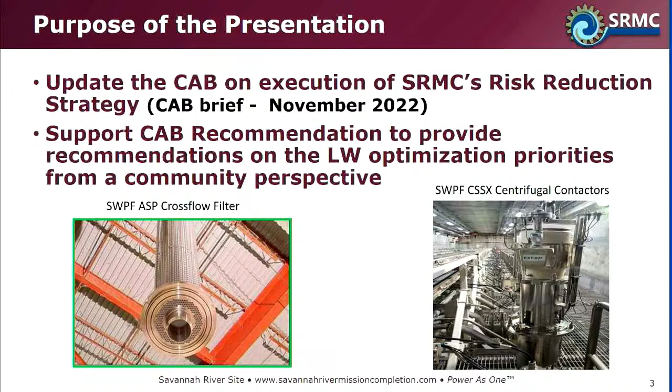I know we have some new CAB members since the last time we spoke, so I was just going to give a very brief overview.

The last thing we're actually building are the last three SDUs, 10, 11, and 12, which just store some of the decontaminated salt solution after it gets grouted and solidified. But all of the processing plants are online. So the mission that we have is pretty simple at this point, in one frame. As far as conceptually, the work involved is complex.

But we remove the waste from the waste tanks, we treat the waste through SWPF and defense waste processing facilities, and then we dispose of the waste. The high activity material we put in glass that comes through DWPF and put in canisters. The lower activity decontaminated stream goes to saltstone, and we make grout that goes into the SDUs.

Some of the concentration of waste in the tank farm, when we do that with the evaporators you can see over here - when they run, they help bring some water off of the waste and concentrate the waste down, and that water gets cleaned up to be releasable to state waters. The canisters are currently stored on site in the glass waste storage building. Once again, we have all that we need there - those buildings, with the double stacking we're doing, will hold all of the cans we're going to process. We are still taking some waste from the canyon that goes on the front end of our process. So that's our mission, and we're very dedicated to that as a collective team.

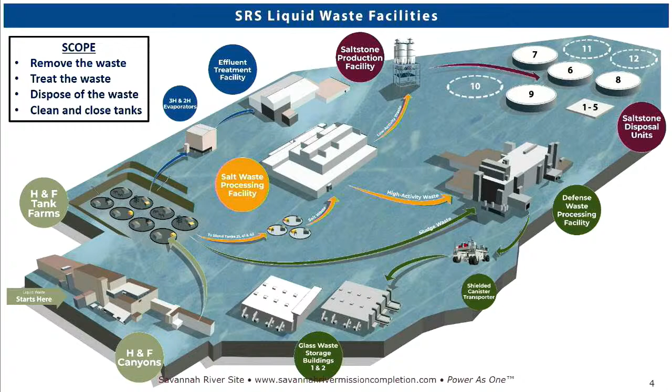Just looking across the top, for the total mission, if you look at our system plan, there are about 19 sludge batches that have to be processed through DWPF. Nine of those are complete, and we're currently processing batch 10. For salt batches going through SWPF, we're projecting 102 batches that we'll make up and feed, of which we're through batch 7, about to move batch 8 over in the next month or so.

Total number of cans that we're going to make over the life of the mission is just north of 8,000 canisters. We're over halfway there already with all the sludge processing and integrated processing we've done to date.

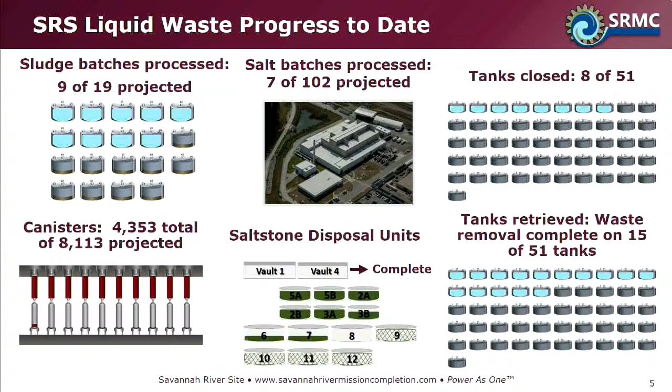Our focus first and foremost is the high curie material first, because that gets the risk down. Just once again, a curie is a measurement that helps define the level of activity or level of radioactivity, the intensity of it for the liquid that's in the tanks. So we made it a priority for SRMC when we came on board to say we wanted to process the higher curie material first and get that through the system.

Because that drives the risk down of what's left in the tanks. The other focus that we had in addition to going after the high curie material is to focus on optimizing and increasing the throughput of the system. Since SWPF has only been online for a few years, when you bring a new plant online and integrate it to the overall series of plants that it's interlaced with, you go through a period of ascension, ramping up, working through issues in the process.

And so we have a heavy focus on optimizations and increasing the throughput and the availability of the plants, and so I'll talk to that today. Part of that is optimizing the timing of when NGS is deployed. I know that was a topic that was brought up yesterday. I'm going to speak to that today and where our current thinking is on that and why.

And then once again, part of the risk reduction strategy is focusing on getting the high-level waste out of tanks that are the old-style tanks, with a particular emphasis on old-style tanks that are actually in the water table in H tank farm.

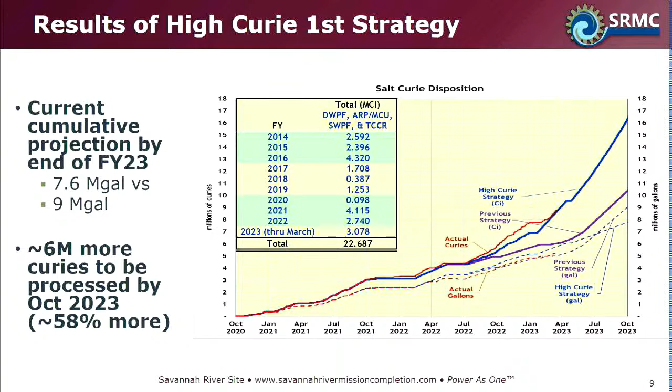So now I want to talk about SWPF processing throughput rates as we keep driving the higher curie batches through, and how we continue to further advance that risk reduction by driving our throughput up as we work through some of these initial issues.

Here's your first car analogy. When you think about the two things that are important about ultimately getting the mission done, you have to get the availability of the plants up, and you've got to get the throughput of the plants up. So if you're driving your car, availability is: is it in the shop or is it on the road driving? And relative to throughput, it's how fast are you driving. I'm going to need both of those, a car on the road and a car that will go the speed limit, to get me to Oak Ridge on time today. So it's nothing more complex than that.

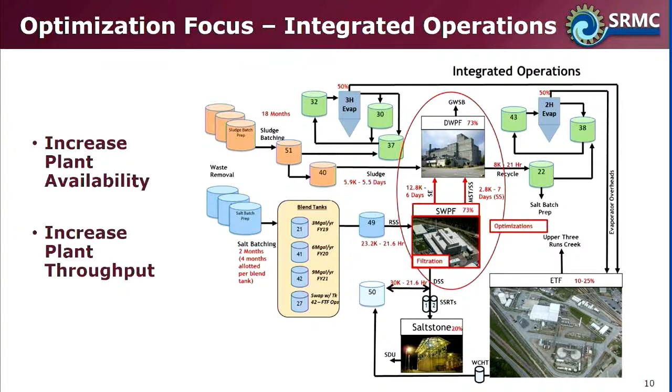Our focus is several-fold. One of the things is we're trying to get our process availability up. Relative to SWPF in particular, we have some solids forming that are causing us downtime, particularly with solvent extraction and particularly with the SE coalescer that's part of solvent extraction. We're seeing it in the contactors and in the SE coalescer.

Relative to throughput, right now filtration is the issue. The way SWPF works is the front end of the process is filtration - we filter out the actinides, things like strontium and plutonium, and those go to DWPF to get in the glass. After filtration, it goes through solvent extraction where we strip the cesium out, and we take the cesium to DWPF and put it in the glass. Then the decontaminated salt solution goes to saltstone - large volume, but decontaminated.

So what happens is while solvent extraction is causing us availability problems, filtration is causing us throughput problems because we're not able to filter as fast as we need to, and we're having to limit solvent extraction's rate because we'll run out of feed if we don't. So a lot of our efforts, which I'll go through in a second, are related to addressing both pieces of that.

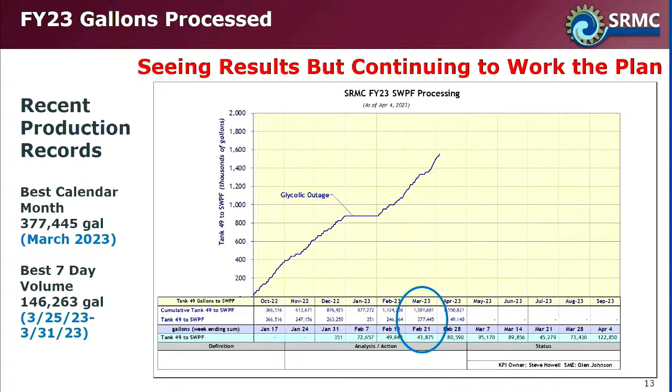Related further to optimizing when NGS is deployed, as I told you before, we originally thought we'd put it in at the end of all the high curie batches. Our modeling has shown that to get to a plan that finishes our mission in 2037, our internal goal, we have to get to higher throughput before that, and we've been seeing good promise with filtration. So what this is reflecting is that in 25, we need to be running at a rate that requires NGS, and filtration has to support it as well.

So what we are currently planning, like you saw in the last graphic, is that right now we think we'll deploy in 24. That's our management decision, hence why production is a little lower while we're doing that, even though we're climbing. The goal is still the same: once filtration is no longer limiting, we'll deploy it, because that lets us get up to these 9 million gallon a year rates overall, which we need, and it's where we're headed.

So that's kind of the curie risk reduction, optimization of SWPF, and how it ties in together.

One thing, back to car analogies, since I don't think I mentioned it earlier, but I did back in November: our throughput ultimately drives how many gallons we're pushing through the system. High curie strategy then is a measure of how effective we're being at getting risk reduced in those gallons. Think of it like miles per gallon, as I used before. You've got miles, you put in so much gas in your car, and depending on your miles per gallon, that determines how much further you can go. That's the same strategy we're doing with high curies while we drive up throughput as well.

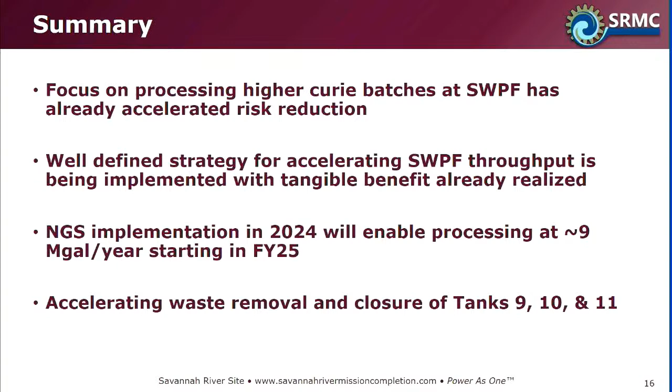And with that, I'll open it for questions.

We'll start down here with Donald. Yes, sir. Oh, can we get you a microphone, please?

Okay. Okay. We'll come all the way around. Sade? Hi, thank you for your presentation.

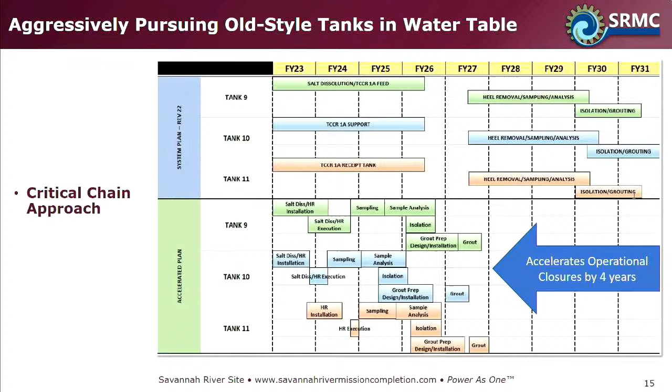That way he can juggle between those and make sure he's supporting all of his customers. With critical chain, you can't do it across your whole project because you can't take that flexibility for people to manage their work away, but you can apply it to a few things that are very, very important. In the past we've done it on things like a melter changeout. When the melter fails in DWPF, all of liquid waste shuts down. So we treat things that are super critical like that with critical chain. It means that is first above everything else. We want to know exactly how long it takes you to do it.

And as soon as you're done with your activity, you finish it, and then you go back to the other, more normal project management schedule, where he has contingency on all of his tasks. So you can't do it everywhere or it doesn't work. But when you have a few things that are super critical like this, it is very effective in driving the schedule faster. So to some degree, what you're doing is saying no multitasking. That's what it says, out of his multitask list of items, when this hits his desk he stops what he's doing and does this, passes his part on, passes his baton on, and then he goes back to his other activities.

Because that process is accelerated, does that mean that any of the safety checks and such are reduced? No, all the same levels of safety checks, the redundancies, like when you have to have second person reviews, the level of his review is not being shortened. We're not asking the person to do their review faster. We're just saying when that activity hits your desk, don't let it sit on your desk for a few days before you do your work. Pause the other things and work on this activity. So everything is exactly the same. The amount of effort they apply, the number of redundant checks that are done, none of that changes.

I would think this would be fairly disruptive in their process. Is there a management overview process determining what tasks fall under critical chain? Yeah, the only ones we're currently deploying it on right now are tanks 9 through 11. And we keep it to a very small group for that reason. Like I said, in the past we've used it on things like melter changeout. This is a case we're using it. We use it on construction of an SDU project because that is a separate team, a dedicated team, so it works very well there as well.

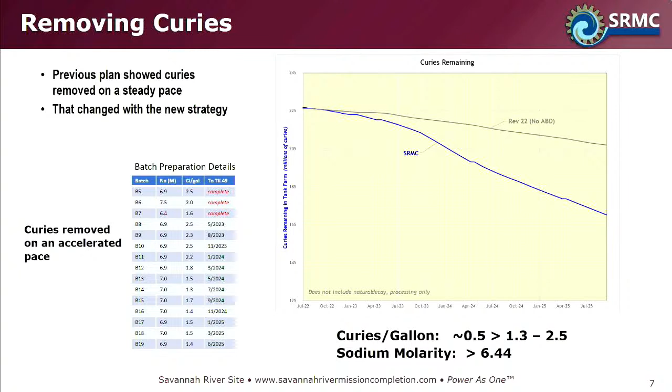I'm not seeing it right now, but it's on.

I'll keep looking. But what we're doing is the dilution that we do in SWPF - we're raising the molarity internal to SWPF and diluting it less before it goes through solvent extraction. We're doing that very deliberately because we want to make sure we don't cause a solids formation problem.

Solids can form if the sodium molarity gets too high, or if your temperature or process flow streams aren't set just right. So you have to be very deliberate as you ramp up internals of the plant, monitoring your parameters well, controlling your temperatures and feed rates well, so you can ramp it up and get the benefit without causing further solids.

We've already increased that and started that campaign a couple of months ago, and it's working very well. We've seen no problems, and past testing tells us that as long as we pay attention to the things we're paying attention to in the plant, we should be able to bring it up.

So this leads to the question for me: the glass plant has been around forever, and it's worked perfectly, and it's old school now. With you ramping to 8.5, 9 million this quickly, are they going to be able to handle it?

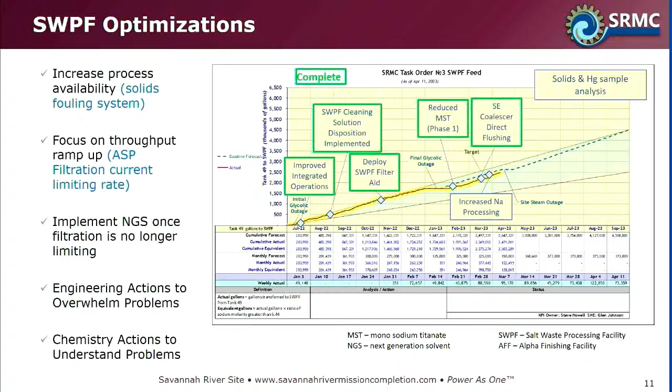So those are probably some of the more significant ones. The other one I would mention is, as I talked before, this lets us not have to take solvent extraction down as much, so the availability on the plant is higher, because we flush the coalescer online most of the time - we don't shut down to clean like we were doing early on. That's been very helpful as well.

But these are some of the ones from this big list that have been very helpful, and there are some others on here that also contributed.

But everything that we've done prior to this May window, all of these improvements, those ultimately are what's helping us get the kind of numbers we're seeing today.

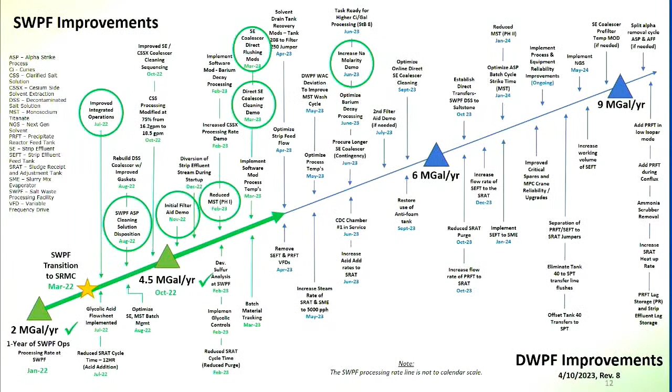Are you going to continue those improvements so you're able to remain at the same level of optimization? Yes, ma'am, that's exactly right. The only one we're not doing right now is the filter aid item, which had mixed results, so currently we're not doing that. We have an activity later where we'll reevaluate whether to do it again, but right now we probably won't need it given the rates we're getting from other improvements. All the other improvements shown here through May, we're continuing to do.

Okay, thank you. I'm also curious, is the average closure for 3 tanks, 4 years? Every 4 years you close up to 3 tanks?

No, it doesn't quite work in a linear fashion because a lot of things are dependent on it. One thing is funding, like to grout the tanks. We're putting all the focus of the funding dollars on risk reduction, the waste removal from the tanks. So if the next dollar spent could either grout an empty tank where the risk has been removed, or get a tank ready to pull more waste out and reduce risk, we're focusing on the risk reduction. With dollars in excess of supporting the plants running at full rate, we start grouting tanks. So sometimes we'll empty a tank and let it delay a little before we grout it.

The other thing is the throughput on the plants. We have several tanks outfitted right now to dissolve salt and get the waste ready for salt batches, but the plants aren't running fast enough, so some of those tanks are sitting waiting for volume to open up, free space, so we can make up salt batches to send to the processing plant. As we continue to ramp up throughput, that starts happening faster, and these outfitted tanks can start dissolving and making up salt batches.

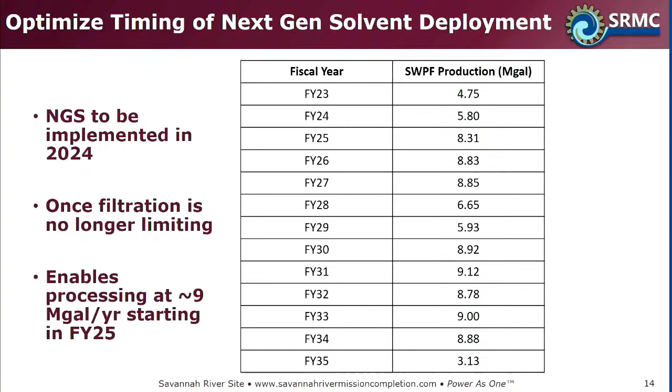So you've got some lower production in FY 28, 29. Clearly that's for some expected downtime. I'm curious what you're expecting in those years that bring you down. FY 29 is a melter change out, so we forecast usually about half a year of downtime for the melter, and 28 might have been, I think, the tail end of 28 and the first part of 29 is when that change out is. Thanks.

Anything else from around the table? Mike, thank you. Okay, thank y'all.

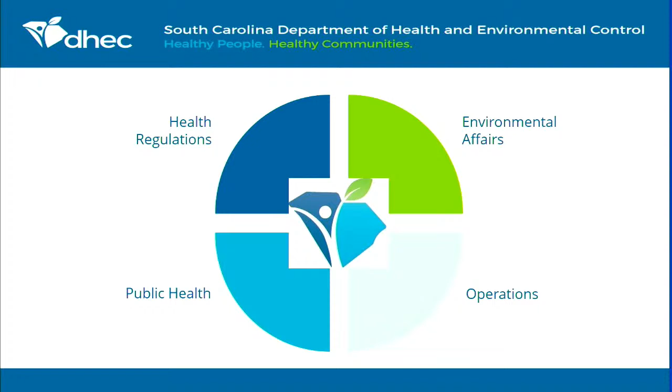Okay, so everybody likes Dr. Seuss, right? My favorite Dr. Seuss character is the Lorax, and I like to think that Environmental Affairs is a little bit like the Lorax. But instead of speaking for the trees, we speak for the air, the water, and the land.

And we do that through our Bureau of Air Quality, Bureau of Water, Bureau of Land and Waste Management, Bureau of Environmental Health Services, which is our district offices, and the Office of Ocean and Coastal Resource Management, or OCRM. With the exception of OCRM, all of these other bureaus interact with Savannah River Site. Unfortunately, SRS is not on the coast, so OCRM doesn't get to play.

DHEC's environmental roles cover four areas: protection of the environment, oversight of activities at the site, emergency preparedness, and improvement through our cleanup programs.

Before I go through each of those areas, I just want to remind you of some things that we do not do at DHEC. We do not regulate the storage of spent nuclear fuel or nuclear materials.

Okay, so what do we do then? I'll start with protection programs. We have environmental permits, and those permits allow the Savannah River Site to conduct activities, but they have to be consistent with federal and state laws and regulations. EPA has delegated authority to the state for a variety of programs in our air, water, waste, and cleanup programs.

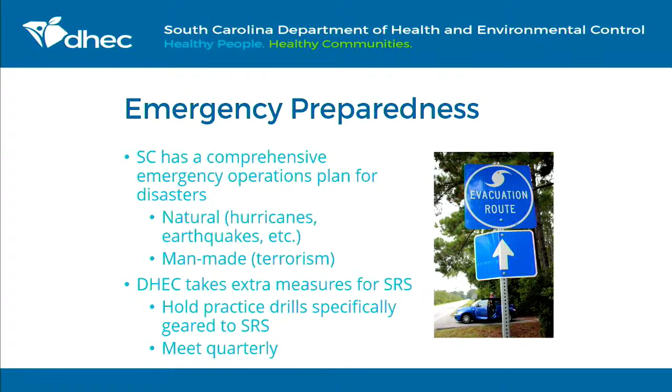Now I want to talk about the final area of environmental affairs, and that's improvement. We are working to improve the quality of life for all South Carolinians through health in the environment, and we do that through our cleanup programs.

We also have a cleanup program through the Federal Facility Agreement, or FFA, and this is mainly our Superfund program that I mentioned I manage. The Federal Facility Agreement takes the RCRA requirements and the CERCLA requirements and marries that process so that the documents we're reviewing will satisfy both RCRA and CERCLA.

The Federal Facility Agreement is a three-party agreement between DOE, EPA, and DHEC. It is a document required by CERCLA for federal facilities, but it can vary between sites. For instance, Savannah River Site's FFA is different than an FFA you would see for Hanford or for a Department of Defense facility.

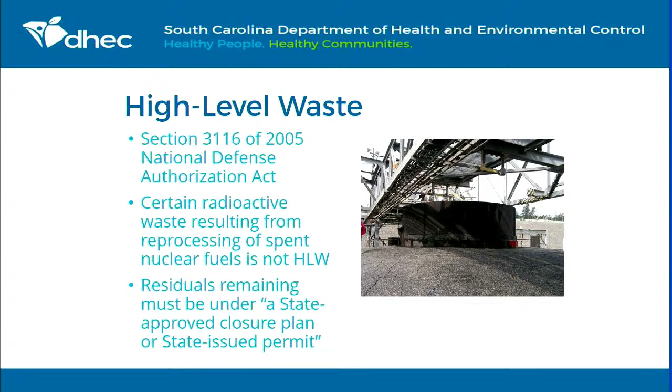So this is where our high-level waste tank permit comes into play. The high-level waste tank permits are written through our Bureau of Water Industrial Wastewater Program. They are operated through a wastewater permit, and then closure is conducted through wastewater closure modules.

We have a consolidated general closure plan that covers the F and H area tank farms, and then there are tank-specific closure modules for each tank as they are closed out. So as Mike showed you the list of tanks, one by one, we'll develop a tank closure module for tank 9 as that one closes out, and tank 10.

So the closure modules are, as I said, tank-specific. They describe operational closure activities. DHEC is going to approve all activities that are associated with waste removal, stabilization, and closure of the tanks. Once a tank is closed out from the wastewater permit, then it will be handled under the Superfund CERCLA program that is under the FFA.

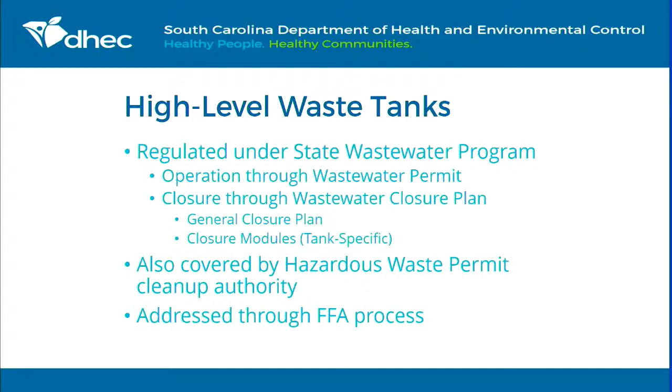There are milestones in the Federal Facility Agreement for preliminary cease of waste removal from the tanks, so that's removing waste out of the tanks, and operational closure, that's grouting up the tanks. Mike alluded to that schedule.

This is for the non-compliant tanks. There are 16 of those still in place. A couple of those are the tanks that are in the water table that he mentioned, where we want to get those accelerated and reduce that risk.

So as those tanks are removed, closed out, and grouted, they are removed from the permit, they go into the FFA, and we follow the CERCLA process to close them out. There'll be decision documents that are produced, things like the record of decision that you see. There'll be a proposed plan that is provided to the public that discusses the proposed remedial decision. Anything else is addressed through the FFA process.

So again, as Mike mentioned this morning, he showed you the liquid waste system with SWPF and DWPF and the saltstone disposal facility. As that waste is removed and treated, the low activity waste that comes out of the salt waste processing facility goes to saltstone disposal facility, and then is grouted in the saltstone disposal units, which are under our Class 3 landfill and solid waste program.

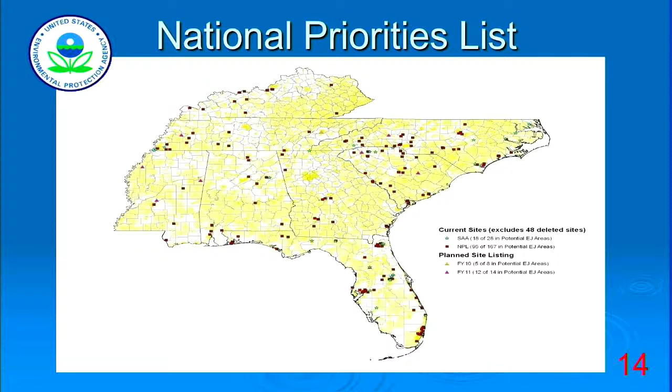Well, Savannah River, we're over 99 operable units. Obviously it's a very large 300 square mile site like Hanford and some of the other big DOE sites, so to give you perspective. And in our region, we have one of the largest numbers of DOE sites.

That's why Region 10, Seattle with Hanford and Idaho, and us with Savannah River, Paducah, Oak Ridge, and then Pinellas that used to make the tritium triggers for nuclear weapons - that's tritium facilities now at Savannah River. So at one time we had 4. Paducah shut down, that was a gas diffusion plant. Part of Oak Ridge also had a gas diffusion plant, it's been shut down too, but a lot of ongoing missions at Savannah River, Oak Ridge.

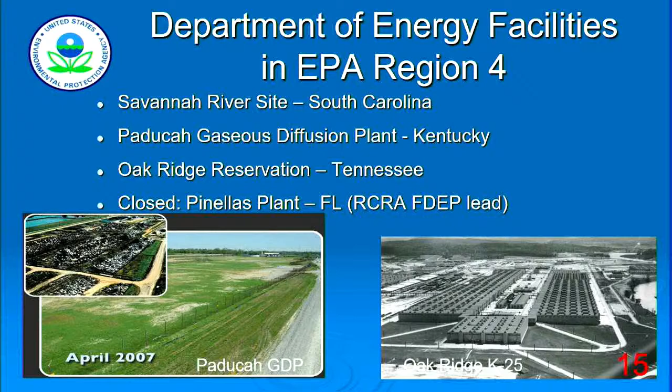This was typical. I don't know, not every DOE site got put on the list. Sometimes it was under a RCRA program like Portsmouth, which is a sister to Paducah. So for some reason it stayed under the state RCRA program for cleanup, where most other DOE sites moved over to Superfund, and then required to have a federal facility agreement - an agreement with the state EPA on priority of cleanup, trying to assess all the facilities that might need to be cleaned up, which we've been working on since '93.

So I mentioned all of these are other acts. RCRA is the Hazardous Waste, Safe Drinking Water Acts. Obviously that's where we implement the drinking water levels in groundwater, even though it's not applicable because it's not a public water supply at Savannah River. But like any other, maybe a Superfund site, you're applying those same drinking water limits to a Superfund site. Clean Water Act, Clean Air Act.

So as I mentioned, the 3-party agreement, that's in this case South Carolina, EPA, and DOE. It governs investigation, remediation program, goes to the roles and responsibility of each party. Obviously we get to a lot of schedules and deadlines, milestones, documents we have to review, procedures, how we work together. And again, our role is oversight of these remedial actions at Savannah River, ensuring that things are done properly according to the NCP, the implementation guidance, and the federal facility agreement, particularly for Savannah River.

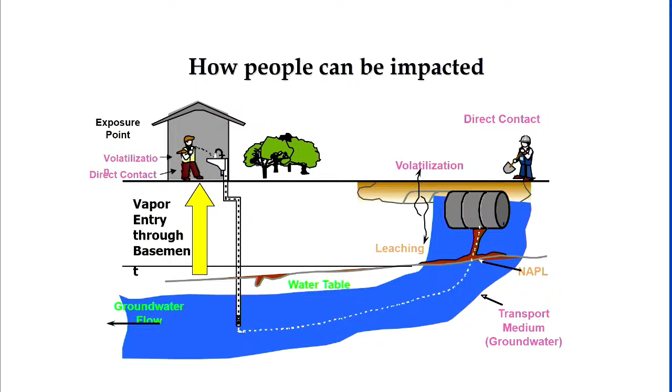Again, how people can be impacted - you just kind of have to go through how things could get contaminated, whether it be drums or something in the groundwater, vapor intrusion, which became a big issue in the last 10 years. I won't spend a lot of time on these, but just kind of to give you a visual of how you can be exposed to things.

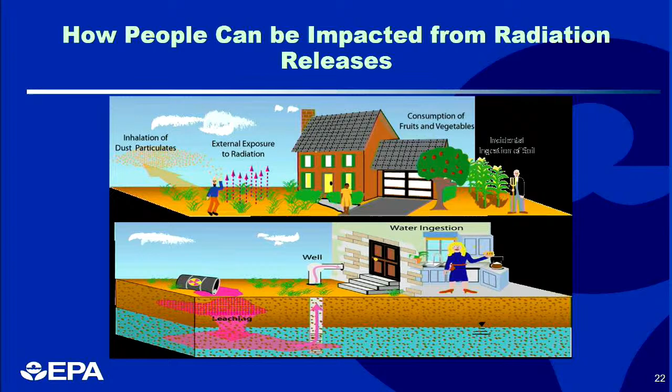This is one from radiation, where sometimes it's a little bit different. We have the same in chemicals when it comes to ingestion of something or inhaling something, that's the same. But obviously chemicals don't have external exposure like from X-rays or gamma rays, while chemicals also have direct exposure, like something to the skin. Dermal exposure is usually something that's not in radiation - that's where the external exposure comes in as our third pathway. So again, another one just kind of showing inside houses how you can be exposed to radon, radiation, etc.

So again, EPA and the state have concurrence required, especially on what we sometimes call the final document for a given operable unit - that would be the record of decision. We have many of those. Think back to the private Superfund site that might have 2 operable units, soil and groundwater.

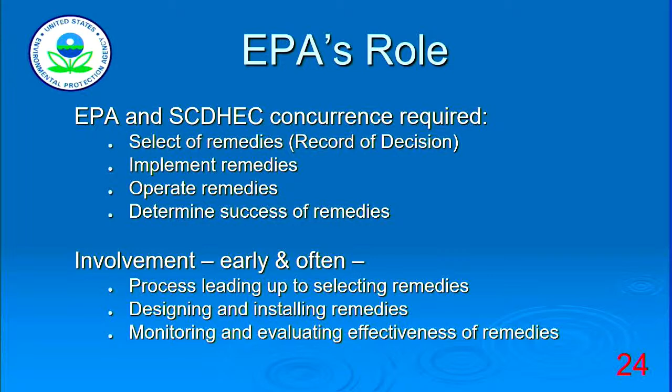It's probably going to have 2 records of decision for how to clean up or address that contamination. We get involved early and often - public meetings, these types of meetings when something new comes along - and we'll go through a lot of the process. The decision process is at our remedial project manager level, RPM level, and as Susan mentioned, the core team process is one of the reasons why we get a lot of things done, especially the last 23, 24 years.

It's actually become one of the showcases across the DOE complex. Rob Pope, my predecessor, many of you know - Susan and Brian, I think Rob helped put together a video from teaching that class we've done here, at other sites, and also at the big Waste Management Symposium, where we have usually almost every DOE site represented. It showcases how we do things and try to work through some of the difficult details, as you can imagine.

I always bring up a site like P area where there was a difficult decision on groundwater cleanup. I don't know if the state and EPA had one thing they wanted to do, DOE had maybe a lesser thing, but we had to compromise. It looked like we were going to go through dispute, where another site might have gone through dispute to finally make a decision at a much higher level. But we worked it through to feel we can do one thing now and maybe another thing later, as part of the core team process.

Yeah, so even our headquarters often gets involved. They used to have to see every one of our record decisions or proposed plans, so they get involved in how we're doing this. Even if DOE or DOD is the lead agency, they get involved. Especially since the last administration, I think that's continued - any remedy that's more than $200 million, and I think any over $50 million has to be reviewed by our headquarters.

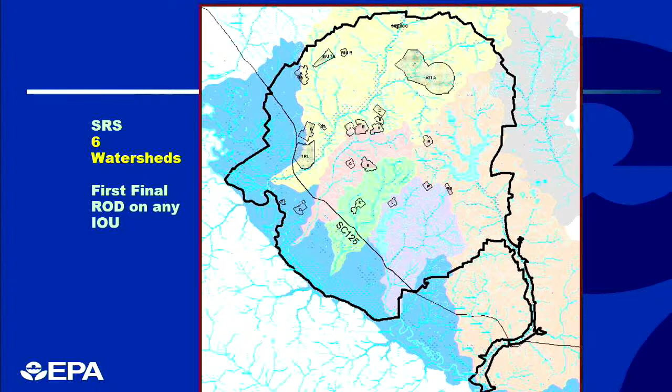So we often talk about watersheds. We use this approach at Oak Ridge even more, with the watershed approach, looking at different watersheds. These integrated operable units, we realize sometimes they're integrated because of the watersheds. That's what's leading up to the lower 3 runs we recently did, upper lower 3 runs, where we did a record decision for 2021.

So a little bit on that. This lower 3 runs integrated operable unit and its watershed, in the Savannah River, it's a large blackwater stream that originated in the northeast part of the Savannah River, follows a southerly direction for 24 miles before it eventually goes into the Savannah River, and that's the tail you often see, this part of DOE Savannah River at the bottom, and considered waters of the state.

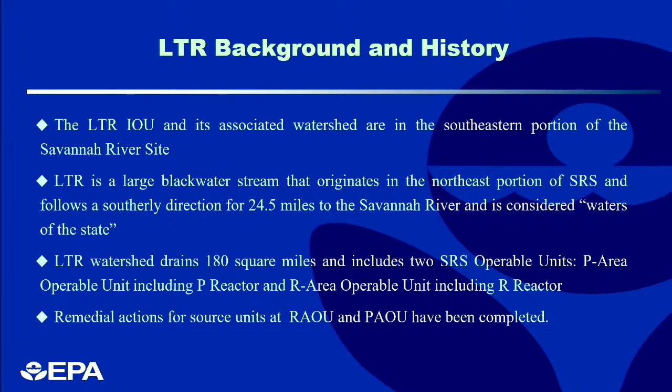That's very important. This watershed drains 180 square miles, includes 2 Savannah River operable units, the P area and R area reactors. Remedial actions for source units at both reactors have been completed, and those reactors have been completely entombed and finished, even though we have ongoing actions around those reactors.

So the lower 3 runs was such a big watershed, it's been divided into 3 units. The lower and middle were taken care of first, especially because the lower was more accessible to the public. That's the tail that went down to the Savannah River.

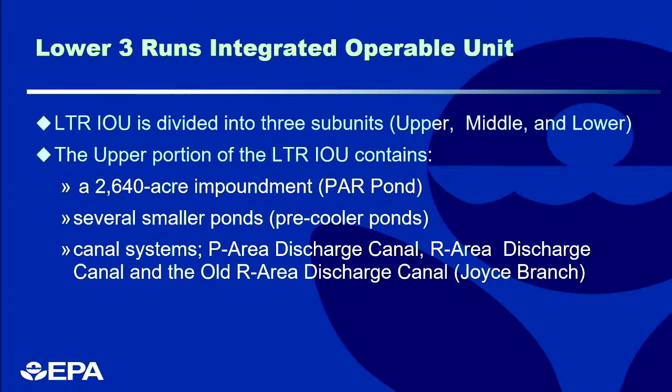So the upper portion was the one that Rob was our lead for, and I think Susan was the lead for you, or Heather for lower 3 runs, and then Brian Hennessy. So you see the acreage in the PAR Pond, several smaller ponds, and all the canal systems that were all involved.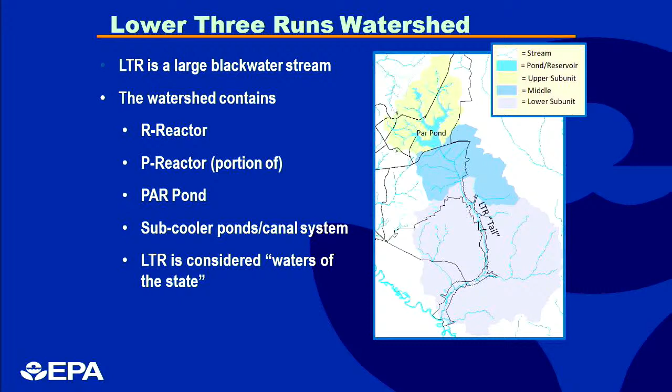Again, mentioned before, large blackwater stream. It contains the R reactor, a portion of the P reactor, and more importantly, PAR Pond. This is again considered waters of the state.

So previous actions on the upper, middle, and lower in 1995 - IROD just means there's an interim record decision. We have many of these in private and federal facilities where sometimes some action's done, but it's not the final action on a given site, maybe because there's just so much to deal with. We're trying to attack pieces at a time.

And that certainly was the case with this whole unit. Specified a water level for the pond to shield radioactive sediments - there's a lot of cesium-137 left over from some of the reactor releases back in the 60s, mostly, that keeping the PAR Pond full obviously shields it from any, especially workers. That would be the only scenario because, again, the public's not allowed in those areas.

And then that was called a time-critical removal action, so excavation of contaminated soil and sediment in some hot spots, and that was based on a possible trespasser scenario. So even back then, they recognized that some spots were hotter than others and decided to take care of that in that time-critical removal action.

And this explanation of significant difference to that 95 decision. That means something that didn't really change too much to the original interim record decision - in other words, if it's a big change, it's going to be a ROD amendment and require another public meeting. In this case, it was just adding land use controls to the tail section, that whole section below Savannah River, the stream after the dam.

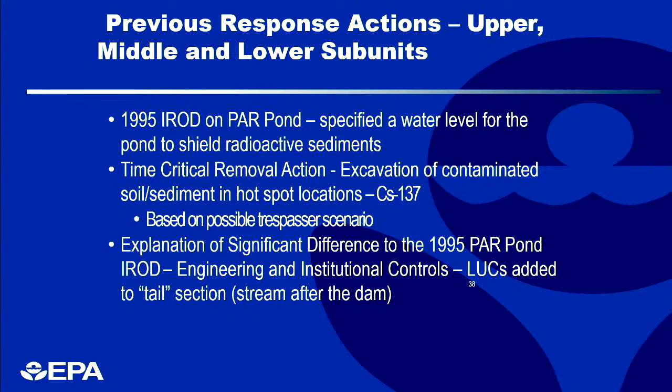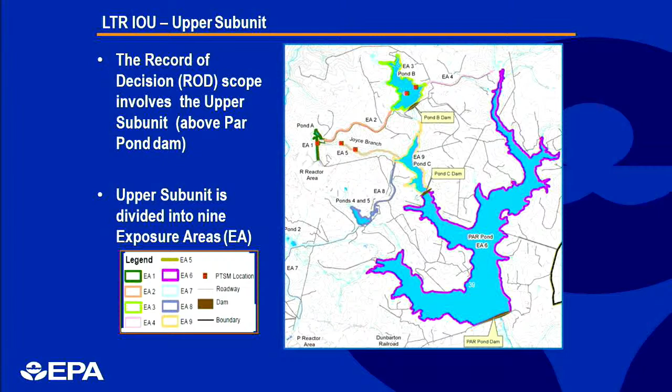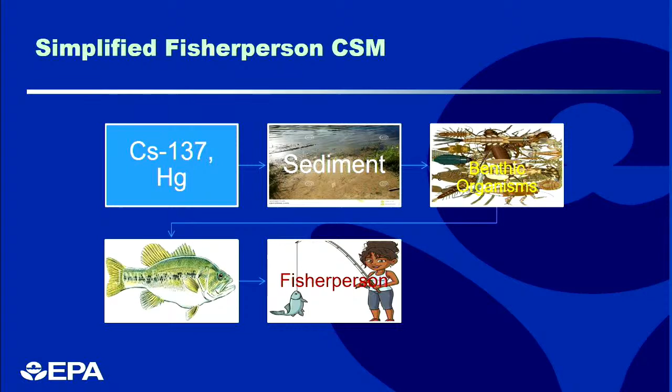And in the fish pathway, again, this was where the cesium and the mercury came in. It's in the sediment, it's in the organisms, in the fish, and then somebody fishing could be exposed to that.

So then in the Record of Decision you have your remedial action objectives. Why are you making this decision? What are you trying to clean up to? That's where you state what it is. The first one is protecting this integrated operable unit, this whole watershed, on-site workers from exposure to those 2 radionuclides in sediment or soil that exceed the threshold - that's 10 to the minus 6, or background levels.

That's important for radionuclides since many are above 10 to the minus 6 in background anyway. Even cesium-137, part of global fallout from atmospheric tests in the 60s and 70s, has a worldwide level that reduces every 30 years, and Savannah River has almost the same number. So we have an idea of what those levels are. Sometimes you cannot get down to 10 to the minus 6 for certain radionuclides and maybe certain metals as well.

The conservative assumption that on-site workers will come into direct contact with the sediment drove that first objective. Then protecting the recreational fisherman - meaning they're not there all the time, not like a subsistence fisherman - from mercury in fish tissue. The primary route of exposure is the ingestion of fish pathway, assuming a fisherperson can gain access to the site or part of it and catch and ingest fish.

Now I'm going to go through - we won't cover all the details, you can see those in the slide - but just cover the alternatives and what we chose. In Superfund you always look at no action: if we don't do anything, obviously there's a different cost, and sometimes you don't have anything. What's the risk if no action is taken at all? This goes through the main alternatives.

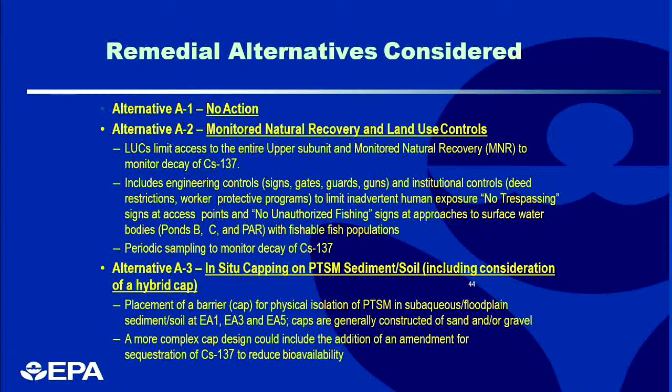The A3, in situ capping means capping in place of the principal threat source material, sediment and soil. Principal threat source material is a term that's a little vague, but it's trying to describe something that may not be that mobile, but is also extremely toxic. It doesn't have to be both. Sometimes it's driven by something that's maybe a 1 in 1,000 risk, where that doesn't mean you necessarily have to excavate it, but you have to take some action to make sure it's better protected.

And then there's two more: total excavation of some of these areas, and treatment and off-site disposal of the sediment and soil. That would be literally taking up anything that was above your level of concern.

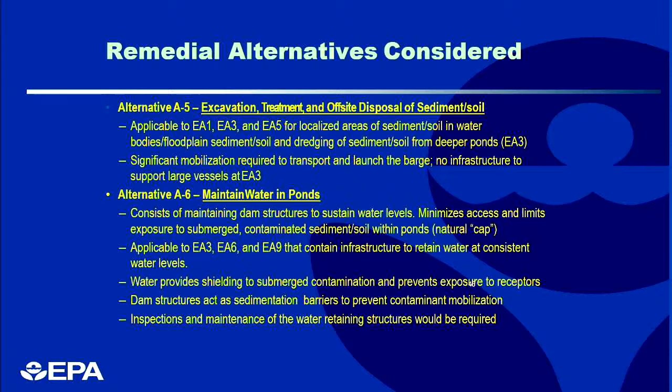And then A6, maintain water in the ponds. Remember the big decision in '95 was to make sure Par Pond always kept water over these sediments so they wouldn't be exposed. In this case, on-site workers couldn't be exposed directly to the gamma radiation from the cesium.

Then you go through the alternative comparison. In Superfund, it's called the nine criteria—everything from overall protection of human health and the environment, chemical specific, mobility, long-term effectiveness. When I talk about ARARs, that means applicable or relevant and appropriate requirements, like drinking water standards, which can't be applicable because it's not a public water supply, but it's usually appropriate since you're talking about groundwater and potentially drinking the water.

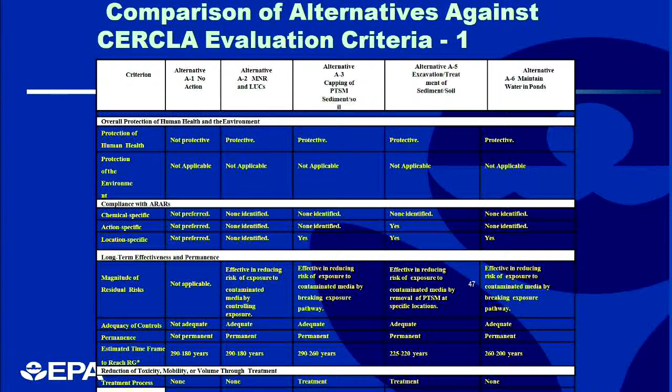So again, this is evaluating each alternative against all those criteria. I'm not going to go through these in detail, you can look at those, but each criterion is weighed against the others to determine which ones are more important.

This one shows that each alternative can benefit from monitored natural recovery, and land use controls is always key. But maybe very few areas would need to be excavated or have water maintained.

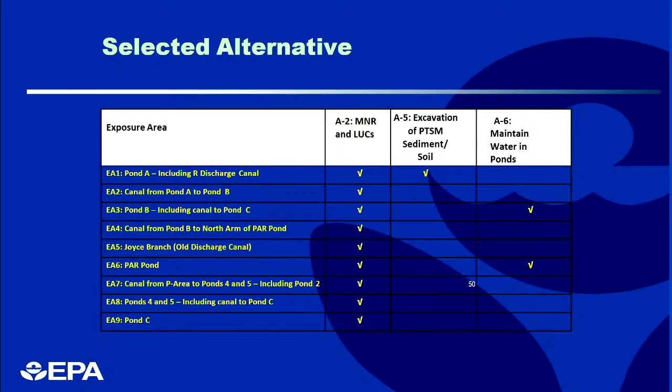So then we get to the preferred alternative for the upper unit, where three of these were actually chosen: alternative A2, land use controls with monitored natural recovery for the entire upper subunit, covering subunits 1 through 9; excavation of the principal threat source material in just one particular unit, EA1, which cost just under $500,000, while the monitored natural recovery and land use controls option was $17 million; and maintaining the water in the ponds, which was also important to keep going rather than assumed, including dam maintenance and other things. The total present worth for all three of those is $23 million.

So again, that was one example—if you have any questions on that—but it's kind of working through what we do in the Superfund process. A lot of work goes into investigation and finding all of that out, but this is kind of the end result of what we do. It's been going on since the 80s and will probably continue for another 30 plus years, with many people passing the work on to keep it going.

So again, that's been very successful at Savannah River. I know my management is always very excited that there's no big issues. In fact, recently my manager kept making the point that the Savannah River site sometimes gets neglected because unless you have an issue, it doesn't come up at the upper management level of what they're having to deal with. So that's a good thing—it means we sometimes have to reach out more to say, here's how things are going great at Savannah River.

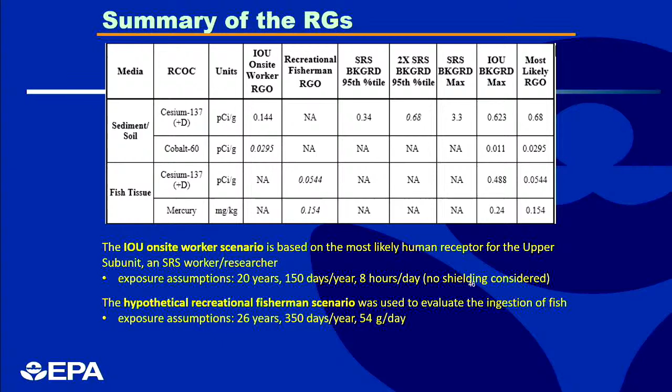Any other detail I'm missing that you're wanting to know about? I perhaps wanted to understand that process of what makes it significant, how you are able to understand the Savannah River site's impact.

Savannah River impact? Well, first you got to pick who the receptors are. So again, it's not going to be a member of the public, but we do have, as you saw in the fish tissue, that could be a member of the public that fishes where they're not supposed to on site. We have the same thing at Oak Ridge, where those areas obviously have fences up. That doesn't mean you keep every person who wants to collect fish, especially in that tail, from coming in.

I don't know if Susan or Heather or Greg know whether they were assuming people come and fish in this upper area - I don't recall that. But that's an example where you first determine who the receptor could possibly be, in this case, on-site worker and the recreational fisher person. And from there, that's how you go through. Maybe you started with 15 radionuclides and 10 metals, but all those fall out when you go through that scenario of exposure. You plug in all the equations. Thank you.

Anything else from around the table? Hearing none - John, thank you so much.